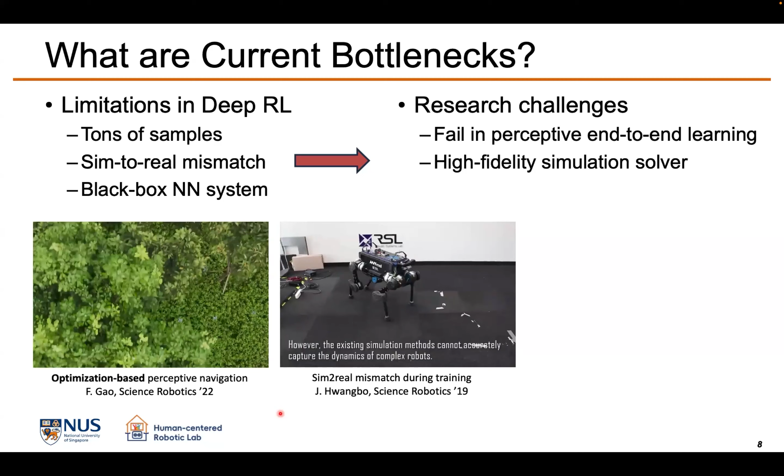Until today, I think we don't see many successful cases for perceptive end-to-end learning directly with deep reinforcement learning. Second, because the simulation mismatch is still huge, especially for contact-rich tasks, we still need very high fidelity simulation software to help us. And last, because reinforcement learning and other learning-based methods are still black box neural network systems...

For example, for some very safety-critical tasks like this SpaceX task, I think we don't yet have the courage to take the risk of using it.

So in my lab, our research goal is not only to make a more intelligent system, but also a more safe system. The important trick for us is simulation. So today I will mainly talk about these three topics.

First, I want to talk about how we can handle high-dimensional end-to-end reinforcement learning problems, maybe with differentiable simulation. I want to show this very successful drone racing example from Professor Davide Scaramuzza. If we look very closely at this example, actually it's a very low-dimensional task.

For example, the drone racing task is just 31 dimensions in one of their Nature papers. But for truly perceptive end-to-end navigation, or local navigation tasks, the input is more than 1,000 dimensions because of image or depth image - super high dimension. So that makes it very difficult.

Why? The reason is traditional reinforcement learning only does forward passes. So when training reinforcement learning, you have to do a lot of random sampling and try to get a gradient based on the samples. That's why it's very sample inefficient. Imagine you have a 1,000-dimensional input system - it's so difficult to roll out to get the result.

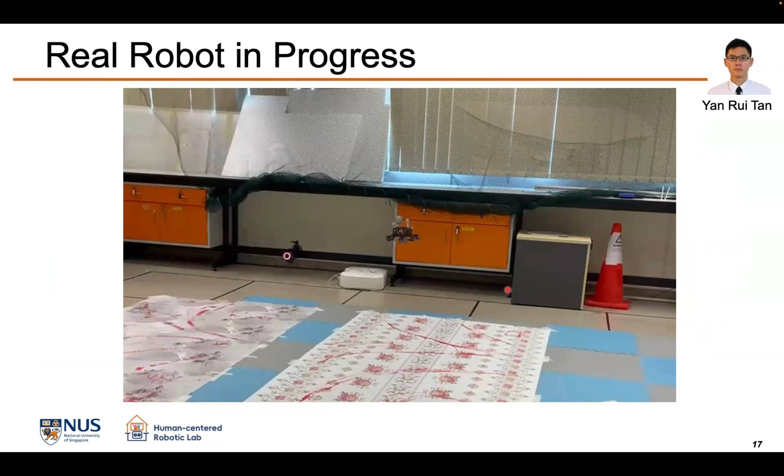We feel like high-dimensional end-to-end learning is still a big challenge, and we are strong believers that new advanced simulation, especially differentiable simulation, can play an important role here.

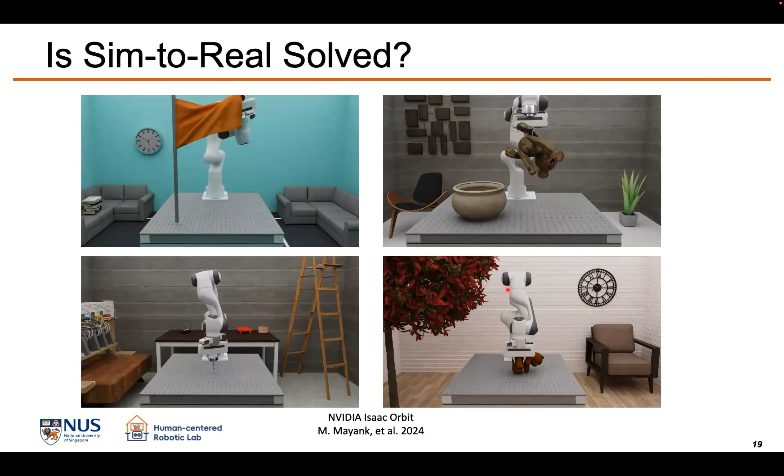This is also my previous colleague, Mayank, and they developed a really nice long-time project called Orbit, recently called Isaac Lab, showing this kind of deformable object manipulation. In simulation it looks super nice, but if we ask ourselves, we still cannot see this kind of thing on real hardware. Why? I think one of the main reasons is that sim-to-real is still very challenging and not solved.

Contact, for example, previously we showed the leg robot, but contact there is still relatively simple. For this robot dog case, it's less than 100 triangles to calculate its contact. But for manipulation tasks, a lot of tasks, like this example, involve more than 10,000 triangles and so on. So trying to make it not only very accurate but also very fast is still a big research challenge.

Thanks to my very talented student, we worked very hard to build some innovation from the low level. We tried to renew some contact solver methods, to make contact-rich tasks not only fast but also accurate.

We have some benchmark tests to show our method works within a real-time budget. The relative error is quite small compared to the ground truth data. We can limit it to 0.1%.

You may ask, what's the trick? It's just that, unfortunately, the student developed a lot of new mathematical methods, and also coded in CUDA language in order to speed things up. A lot of hard work and credit goes to the students.

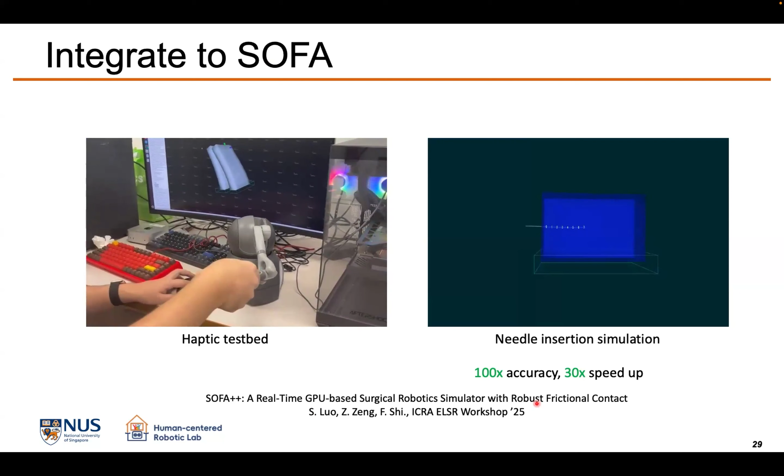Some cases are shown in SOFA, one of the very famous medical simulation platforms. My student integrated their contact solver into this simulation to achieve state-of-the-art results with deformable objects. One case is a haptic testbed. Another, imagine you insert a needle and manipulate some tissue and so on. This can be used not only for policy training, but also for doctor training and so on.

So also some benchmark we show is like, okay, our method compared to the complete Newton method will almost achieve a similar performance. Newton method is great, but it's very time consuming. So we are trying to emphasize we are under the real-time budget to achieve such kind of result.

Nowadays we try to push forward our simulation even for some articulated objects. So maybe next year I can show more on this part. And then you may ask, as a robotics lab, why do you put so much effort on simulation? The first point is it's very helpful for us to do policy learning. Another thing I really want to emphasize is it's also super useful for policy validation or for robustness assessment.

So why do we want to do robustness assessment? First, some storytelling: previously, based on my experience, we found reinforcement learning is actually super good in real-world applications. However, every time an industrial visitor came to our lab, they would always ask, okay, a neural network controller is great, but I need some guarantee. Give me some guarantee.

Unfortunately, today, I think Professor Luca worked a lot on this part. For me, I'm sorry, I cannot give you a guarantee. But what I can give is I can help you do some assessment.

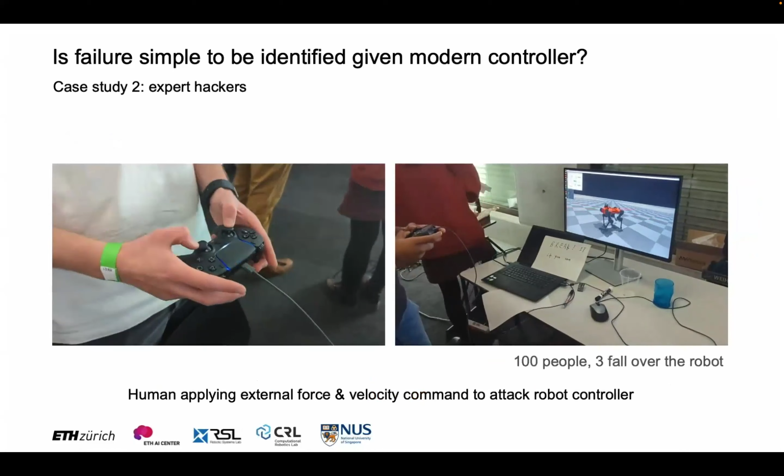A very interesting thing is we held a kind of AI safety challenge inside the lab. We invited almost 100 people who are experts in legged robots and asked them to knock over this robot. Unfortunately, only 3 people could do it, even though it's just an open source controller, which is very simple.

But if we compare to a computational method, the result is very interesting. Compared to the winner, with the computational adversary method the survival time is much shorter, only 1.3 seconds. It finds a strategy that makes the robot fall over. Meanwhile, the falling angular velocity is much higher, meaning the damage is higher. I think this example really shows that we need a computational method. Domain expert intuition has great difficulty finding failure cases for modern systems.

After that, we tried our state-of-the-art control policy. The previous one was just an open source, very simple MLP policy. Then we tested the world model-based controller which won the DARPA SubT challenge. We were very surprised to find we just applied a very small adversarial signal. We assume the robot state estimation has no more than 3 degrees of error, which is very small.

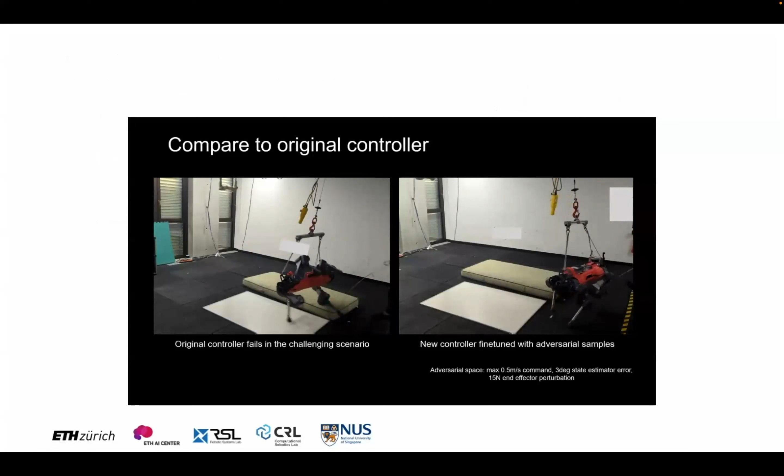So here we just want to show we also have some technique to make the adversary as realistic as possible. So after we find the failure case, one more thing we can do is to improve the robustness by training together with these failure examples. So the left side is the original controller, and the right side is our robust controller after this robustness assessment. So by finding the real corner case weakness of our controller, we can further train together with these very challenging corner cases to make the previous robot controller more robust.

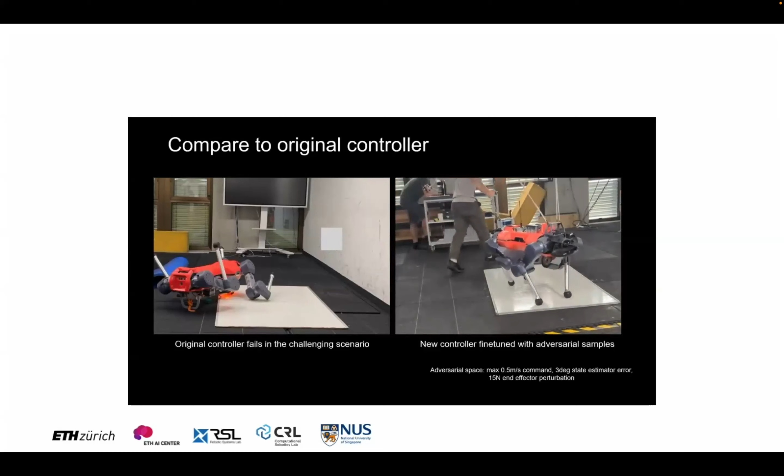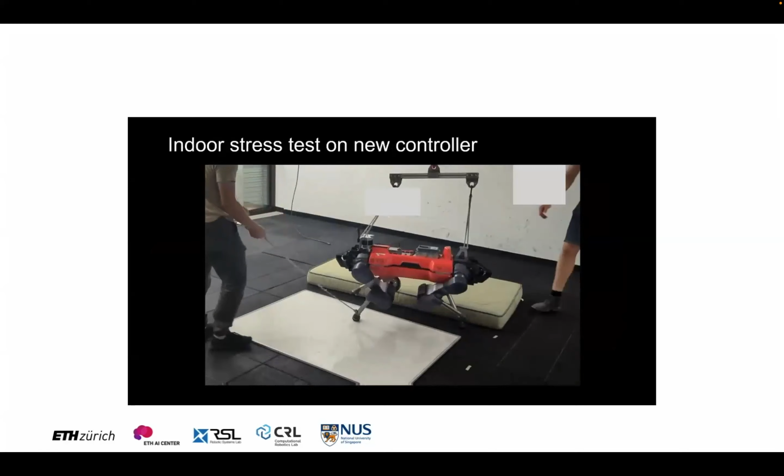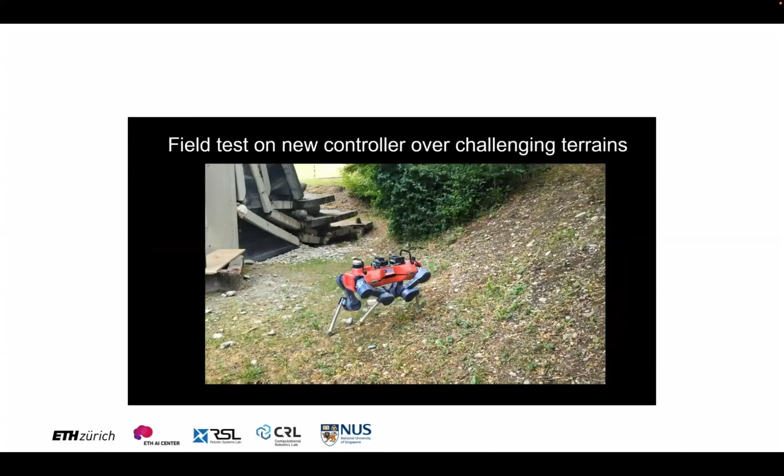So this is just to show you some super harsh environments for robots. So after that, my colleague who designed the previous controller said, "Oh, I don't trust it. I want to test by myself." I said, "Yeah, please." So this guy is the guy who developed the original controller. He tried to do a very hard stress test on this robot to show whether this can really help to make the controller more robust. And we also show some outdoor experiments.

I'll just skip here. So our method is not only targeted at reinforcement learning based controllers, but we can very easily find failure cases in other controllers. So this controller is the MIT Mini Cheetah's controller, which is also the golden standard for robot MPC controllers. We find it super easy to find the failure case with this MPC controller. And also we have some technique to encourage diversity in the failure discovery, because we don't want to just find one failure case, we want to cover as much as possible.

So some takeaways of this work: first, we think attacks can be used as a robustness indicator to compare the robustness of different controllers. Second, very interesting, we found that multi-modality attacks are usually stronger. So our attack space can be the command space, the observation space, meaning the state estimation error, and the perturbation space, like perturbation force. We found a single space modality alone can never make this very robust controller fail. But if we combine two spaces together, the attack result can be much stronger.

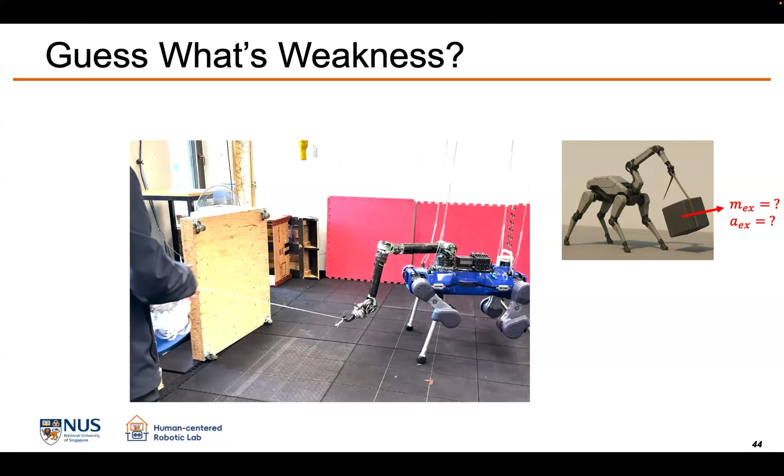So yeah, I'm happy to show some more recent cases. Imagine this robot, which we call ARMA, a robot with a manipulation arm. You can guess what's the weakness of this robot. Imagine you can add some random perturbation force on the end effector. What's maybe the failure case? I can show what the AI learned as a failure case with reinforcement learning. One failure case is very smart: it tries to push the robot's end effector to hit the ground. And eventually it will make the robot fall because the center of mass loses balance.

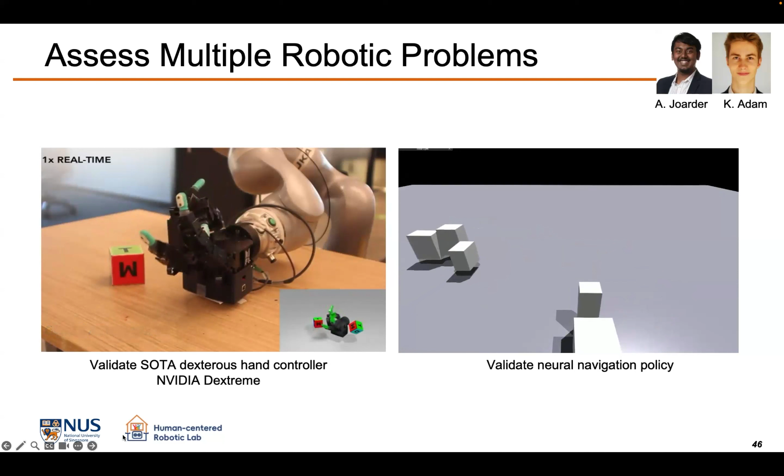And the second kind of failure case it learned by itself is to make the robot hit itself this way. So it's all self-discovered by the learning-based method. And after training together with these failure cases, we can make the controller more robust. Every time we apply some adversarial behavior, it actively reacts to this case. So the proposed method not only works for legged robots, but recently we also pushed it to manipulation. Here we worked with some NVIDIA people to test their NVIDIA dexterous manipulation policy. And also for navigation and so on.

So far we show that we want to have a very nice simulation, not only for policy learning, but also so we can do policy validation. For policy validation, there are still some problems for assessment. So first, I will be very honest to say we still lack diversity. Usually our method will converge to one specific case. It's very difficult to guarantee to cover all the corner cases.

Second, it's still computationally expensive, especially, imagine you are searching for a long tail, while it's a time-sequential attack sequence, very difficult. So again, we can reuse our differentiable simulation framework because it can avoid a lot of samples and directly use the gradient to guide the search. Some initial trials already show in this work, with differentiable simulation, we can find a failure case of the robot controller.

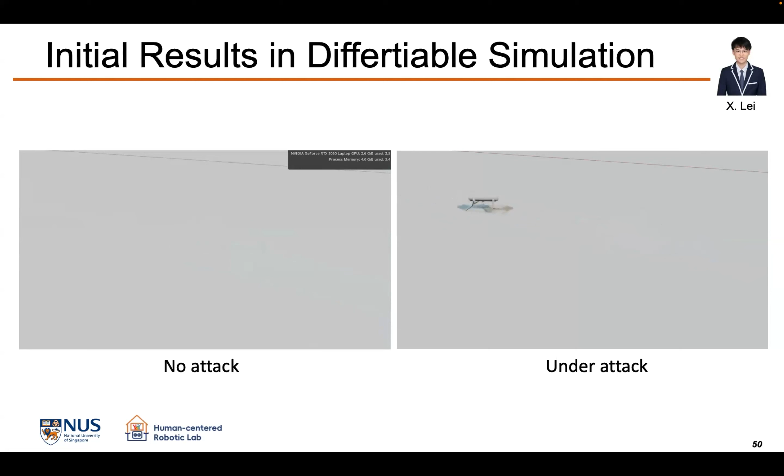And the second and last point I want to mention is, so far we show we can find the failure case, we can do the assessment. But if you think deeper, it's actually still a black box, right? We want to make it more transparent, but it's still a black box. Is it possible to make it more white box? So here I want to briefly introduce one of our very initial attempts to use a white box transformer.

One case is we can use this to compare how many layers we really need in our neural network design. We found actually near the 7th or 8th layer, the information is already reduced to almost the lowest level, which means maybe we don't need more layers for robot control. But still, for this point, a lot of things can be explored to make the whole system more transparent.